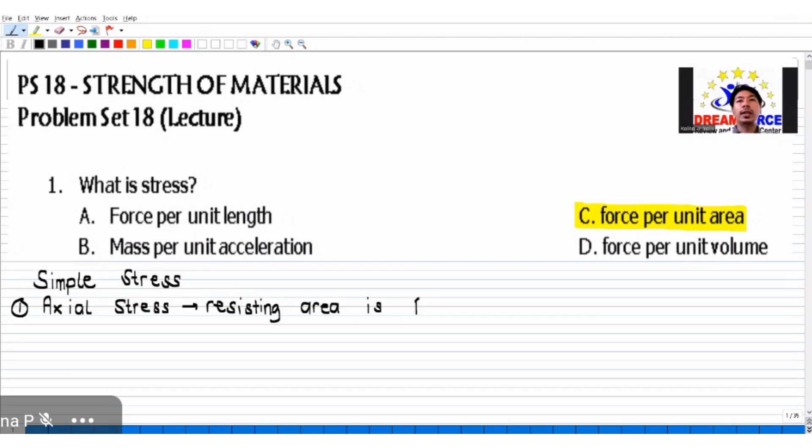Si axial stress, yung resisting area po natin ay perpendicular. Resisting area is perpendicular. Sabi natin, the stress is dependent on the area, based on our formula. So it is perpendicular. Okay, next one.

Si axial stress, meron po tayong dalawang types: the tensile stress, and then the compressive stress. Kung ma-recall po natin sa ating college days, yung pagkakaiba lang po niyan ay yung direction ng force natin. Yung tensile stress, kumbaga pahila. Yung compressive naman, from the word compress, kumbaga iipitin mo yung isang body, ibig sabihin papasok yung ating force. So that are the basic or the simple stress.

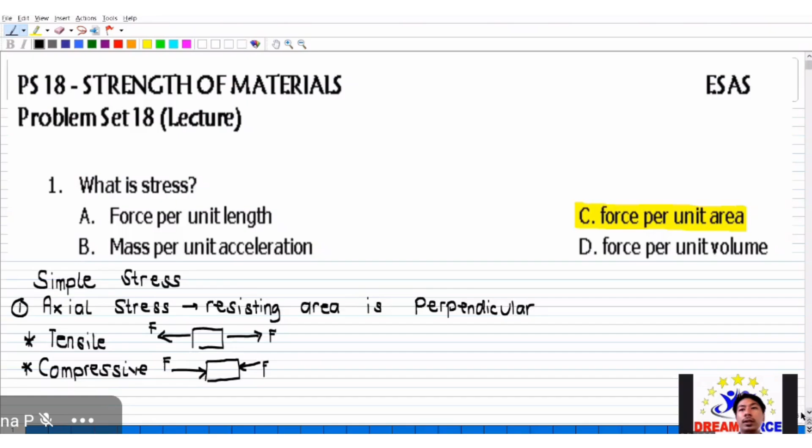Another type of simple stress is the shearing stress. As per the definition, based on the possible na ibigay sa board exam, yung difference niya between axial and the shearing stress: sa shearing stress, yung resisting area po natin ay parallel. Yan po yung difference between the two. Marami pa po yan, bending stress, torsional stress, and so on. But dito muna tayo sa two types. So yan po yung number 1. Kindly take a screenshot.

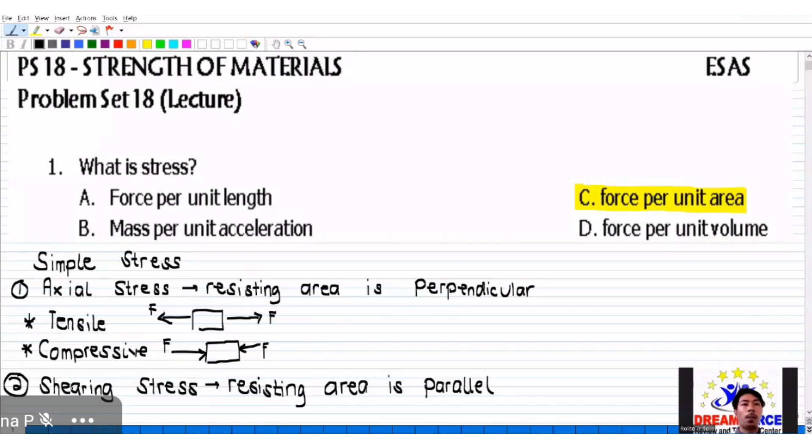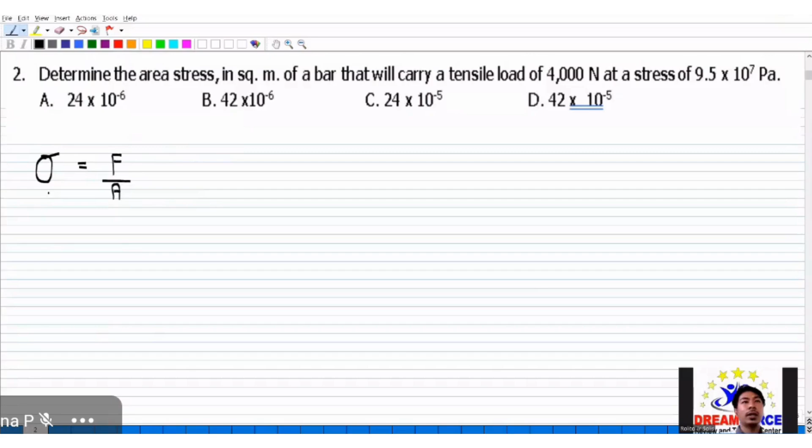Let's proceed on solving number 2. Determine the area in square meter of a bar that will carry a tensile load of 4,000 Newton at a stress of 9.5 times 10 raised to 7 pascals. Yung stress po natin, i-symbolize natin as sigma. This is equivalent to your force divided by your area. Kung ipaparehas po natin sa fluid mechanics, yung stress ay equivalent ng pressure. Ang difference lang, sa fluids ay mga liquids, dito mga solids naman. Since stress is synonymous to pressure, the same sila ng ating units.

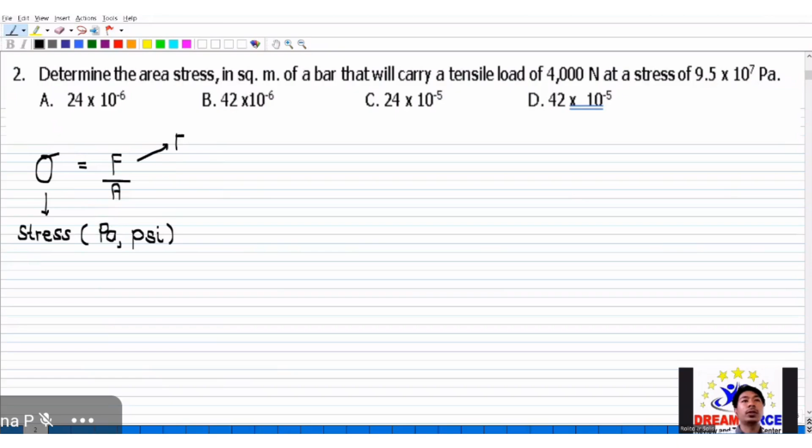The different units of stress: in SI, it is pascals; in English, it is PSI, and so on. Kung ano man yung mga units ng ating pressure, the same with stress. Itong F is the force, pwedeng in newtons for SI, and pound force for English. Ito yung load na bibitbitin or i-withstand ng isang body. And then A is the area, in square meter or inches square, and so on, kung ano man yung binibigay sa given natin.

Let's start number 2. I-apply lang po natin yan, direct substitution. We have the stress, which is 9.5 times 10 raised to 7. Very important po sa ESAS natin na alam nating mag-unit analysis, kasi kahit nakalimutan mo yung formula, based on the unit malalaman mo yung formula. Pascal is Newton per square meter. Newton is a unit of force, from here it is 4,000 Newton, and square meter is a unit of area.

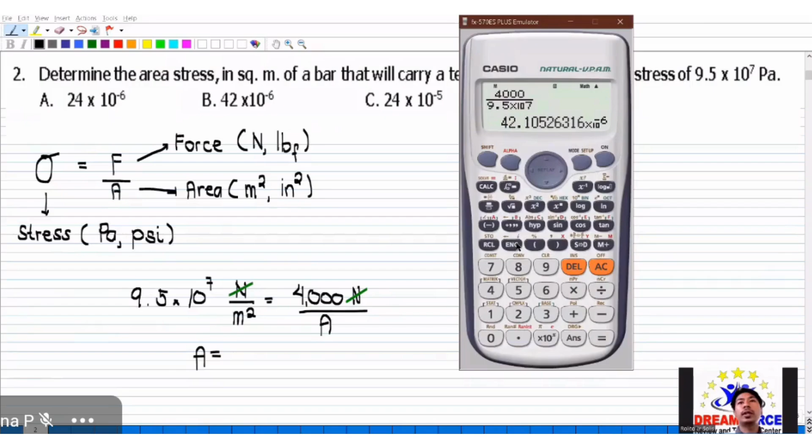Okay, so ayan po. So that's the importance of your unit analysis. Okay, so shift solve, what is your area? Okay, so it is 4,000, divided by 9.5 times 10 raised to 7. Okay, so para maging times 10 to the negative 6, just press ENG. So our answer there would be 42.11 times 10 to the negative 6 in square meter. Okay, so that would be our letter B.

Okay, so yan po yung sagot natin. So double check your solution. Okay, kasi as we can see, merong 10 to the negative 5 dito. Baka nakulangan ka ng 0 or baka namali yung tingin mo dito or namali yung input mo. Kaya always double check your solution. Okay, sige, that would be our number 2.

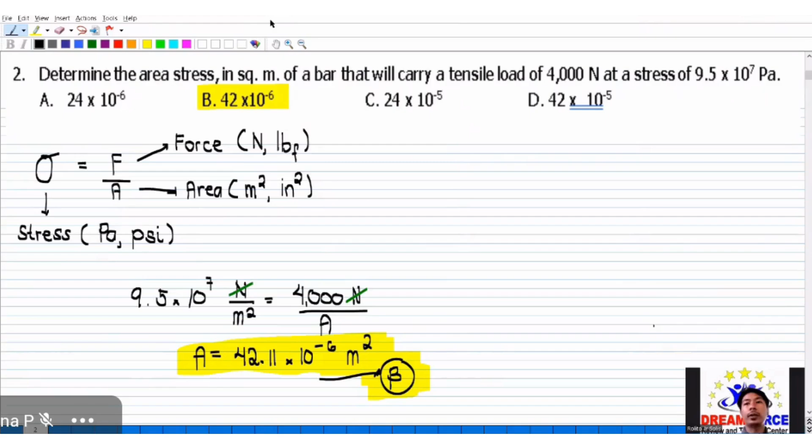Okay, so ang gagawin lang natin dito po sa ating lecture, formula base, and then unit analysis, and then conversions. Ang pangit nga lang po kay strength of materials, napakaraming formula. Pero yung solution niya is usually it is a direct substitution.

Okay, number 3, so find the required diameter of a steel member if the tensile design load is 7,000 pounds, assuming a safety factor of 5 based on an ultimate strength of 60,000 pound force per square inch. Okay, so dito meron po tayong new given, which is the safety factor.

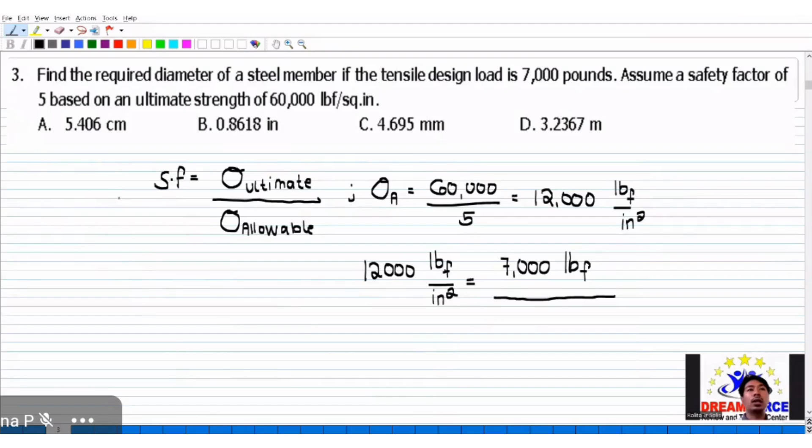So keyword mo lang dyan, basta wala kang nakitang word na hollow or walang binigay na outside diameter, inside diameter, or thickness, always assume that our circular is solid. So therefore, wala naman po tayong keywords dyan. Walang thickness, walang outside, walang inside. So we will assume that that is a solid. In the case of solid, our formula is just pi over 4 times the square of the diameter.

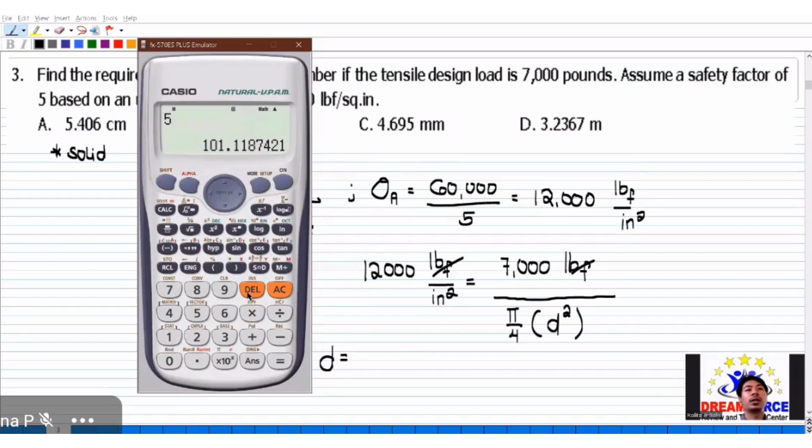Okay, so 0.8618. So since meron naman po yan sa choices, yun na po yung sagot natin. Unless in-specify sa problem na isosolve daw natin in millimeters or in centimeters. Okay, so answer there is your letter.

Okay, so formula-based po ito, direct substitution. So, di naman na kailangan ng solution sa board exam, so pwede na po yan agad i-shift solve. Okay, sige, that's our number 3.

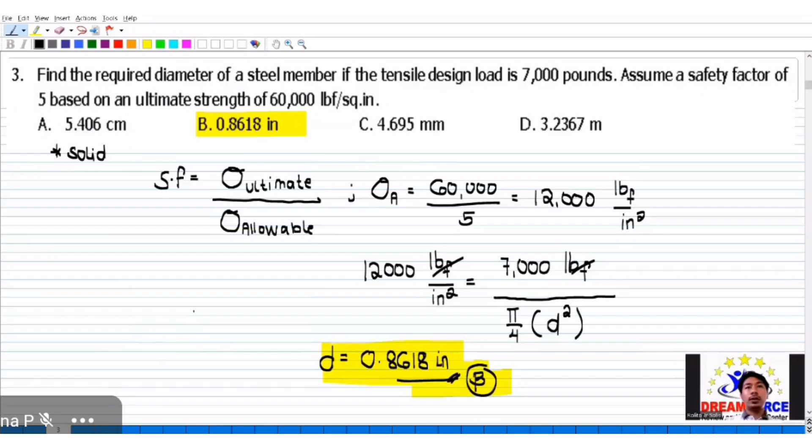Okay, next one, so let's proceed on number 4. So, determine the outside diameter. Ito na yung sinasabi ko po, engineers. So, we have a keyword, hollow steel tube. So, that will carry a tensile load of 500 kilonewton at a stress of 140 meganewton per square meter. So, assume the wall thickness to be 1/10 of the outside diameter.

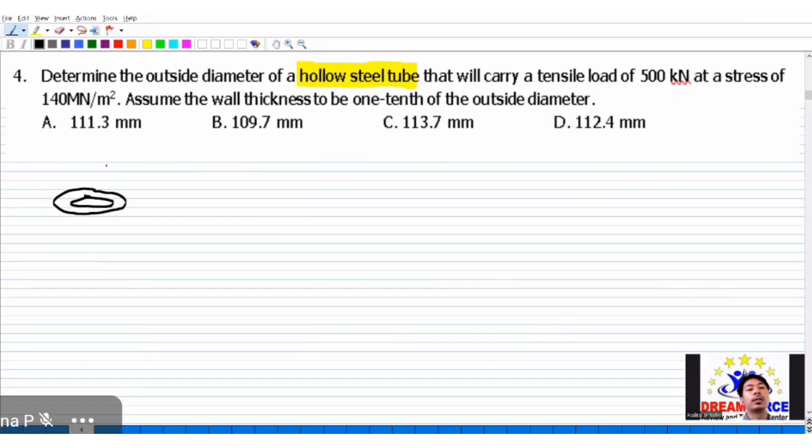Okay, again, so formula po natin, so stress is equivalent to force over area. Okay, so ito engineers, so at hollow circular shape. Okay, so di ba, kung maalala pa nung college, meron tayong dalawang formula na ginagamit dito, di ba? Okay, so first, yung area is pi over 4, multiplied by the outside square minus the inside square. So ito po yung hollow. Okay, and then also area is also pi dt. Okay, ito naman yung sa integral calculus, ito yung parang disk method natin, di ba? Yung pi dt.

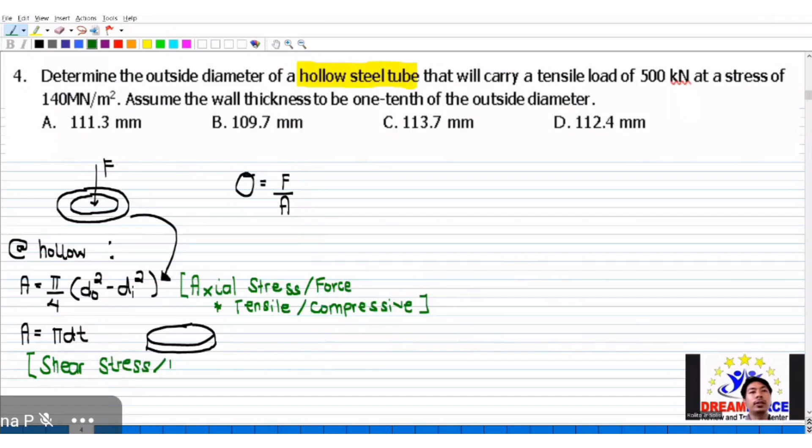Yan. So from our number 4, dito daw ay tensile. So ibig sabihin, ang gagamitin natin is yung hollow tube natin. Okay, kung hindi ka sure, pwede mo namang i-trial and error, kung yung ginawa mo ay wala naman sa choices. Okay, so then also, di ba meron tayong relationship: the outside diameter is equivalent to the inside diameter plus twice of our thickness.

Ayan. Okay, so and then also engineers, meron po akong ibibigay na optional na pwede mong i-memorize na conversion. Wherein 1 megapascal, this is also 1 meganewton per square meter. Parehas lang din po yan sa 1 newton per square millimeter. Okay, optional, so pwede mo pong gamitin or hindi. So 1 megapascal is also 1 newton per square millimeter. Ayan, shortcut conversion na po yan, kung gusto mong gamitin. Okay, so ang hinahanap dito ay the outside diameter. So therefore, gagamitin natin tong area na to.

So as we can see, let's check the given. So meron na tayong stress. So okay na. Meron na rin tayong force. So sa area na lang, ang unknown natin ay outside, but wala tayong inside diameter. So it will be two unknowns. So kailangan pa nating mag-convert or kumuha pa ng isang formula.

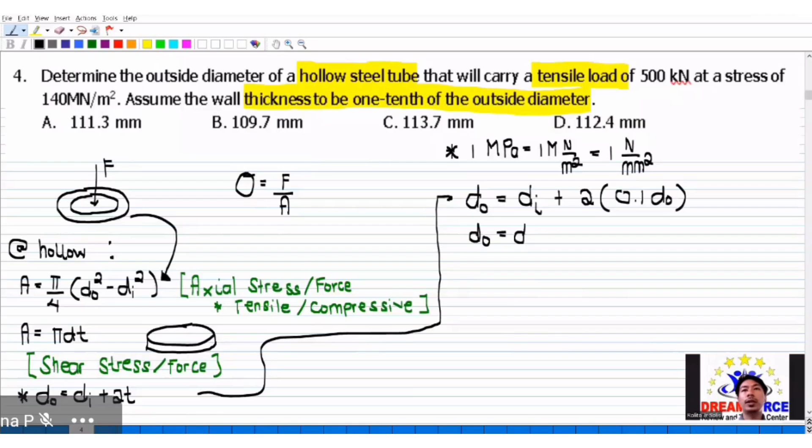Okay, wherein pwede nating gamitin po, engineers, itong relationship na ito: the outside diameter is equivalent to the inside diameter plus twice the thickness. But sabi niya din dito, the thickness daw ay 1/10 of the outside diameter. So therefore, I can substitute. So this is 2 multiplied by 1/10, or 0.1, of do. Okay, so simplify lang po natin. So we have the outside diameter equivalent to inside plus 0.2 do. So therefore, the inside diameter now is 1 minus 0.2, or 0.8 of do.

Okay, so ayan, so pwede na po natin yung i-substitute doon sa ating inside diameter. So there will be one equation with one unknown. Okay, so substitute. So since yung choices ay millimeters, so ang gagawin ko na lang po yung stress, i-convert ko na lang sa millimeter. Okay, or ang pwede mo namang gawin, depende po sa inyo kung saan kayo mas nadadalian. So pwede nyo rin gawin, i-remain nyo yung stress and then yung makukuha mong diameter later on, i-convert mo sa millimeter. Okay, so anyway, parehas lang po yung sagot.

So ang gagawin ko na lang, engineers, yung stress, convert ko na lang siya sa per square mm. Okay, so I can use this conversion. Sabi natin, yung 140 meganewton per square meter is also 140 newton per square millimeter. Okay, alisin mo lang yung m. So this is equivalent to, so we have 500 times 10 raised to 3 newton. Okay, so kung iba yung conversion mo, kung ni-remain mo as meter, tapos yung sagot mo later on kinonvert mo sa millimeter, so no problem with that.

Okay, so pi over 4, multiplied by the outside diameter squared, minus the inside, but inside is also 0.8. At least yan, engineers, direction na. So, hindi na po ako magko-convert. Shift solve, what is our outside diameter? Let's try to calculate. So, 140, this is equivalent to 500 times 10 raised to 3, divided by pi over 4. Okay, and then multiplied by x squared, or you can also calculate 0.8x and then square.

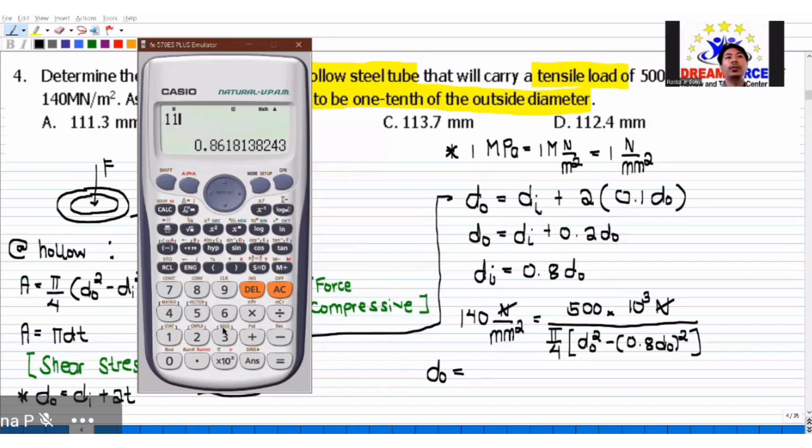Shift solve. So let's say 115. Okay, answer there is 112.4 mm. Okay, that is your letter D. Okay, so that is our answer. Yan, kung nag-meters ka, so yung makukuha mo dito ay meters. So, convert mo na lang po siya sa millimeters. Anyway, parehas lang po yung sagot. Sige, so kindly take a screenshot.

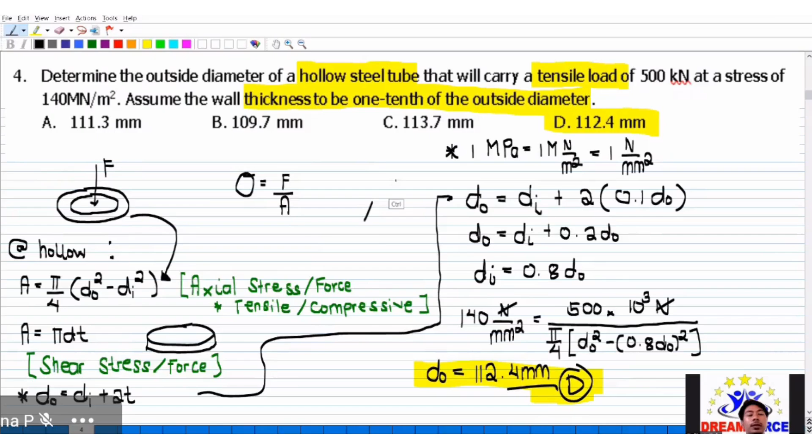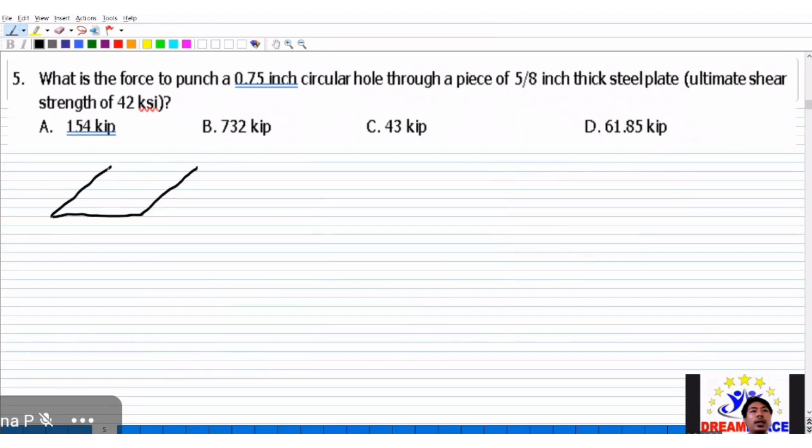Okay, sige, let's go on to number 5. So, what is the force to punch a 0.75 inch circular hole through a piece of 5/8 inches thick steel plate? Ultimate shear strength of 42 KSI. Okay, so again, dito meron tayong thickness. Ibig sabihin, that can be a hollow or may butas sa gitna. Basta may thickness, dalawa po yan, no? It is either hollow or disc. So hindi na po tayo mag-i-imagine, but rather, we will just see the keyword.

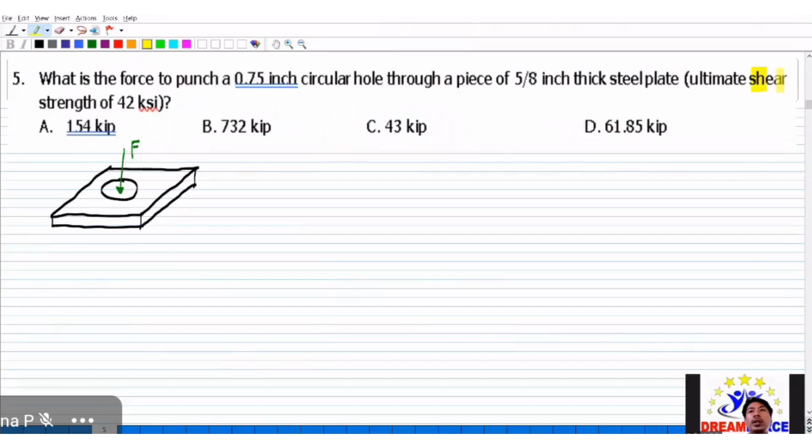Okay, so ganito po yung problem natin. So meron daw tayong plate. Tapos bubutas daw tayo. So dyan, ano daw yung force na ibubutas natin dito? Okay, ayan. So as we can see ulit, since yung keyword natin ay shear. So ito, shear stress. Ibig sabihin, yung ating gagamitin na area is disc. Ito po yung involved cross-sectional area natin. Okay, so formula ulit, stress is equivalent to force over area.

Kung nagwa-wonder kayo, sir, ang binigay ay ultimate shear strength. Di ba dapat sir, ang gagamitin natin dito is allowable, which is true. But engineers, pag binigay po tayong ultimate shear strength, pero wala pong binigay na safety factor, we will assume that your safety factor is 1. Therefore, yung allowable ay parehas po sa ultimate shear, since wala namang safety factor dito.

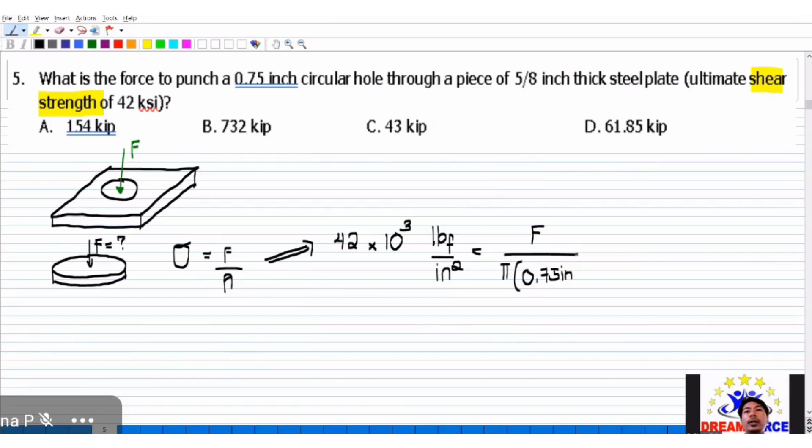So therefore, substitute. We have your stress, 42 KSI. KSI means 1,000 PSI, kilo PSI. So this is 42 times 10 raised to 3 PSI, pound force per square inch. This is equivalent to your unknown force divided by our area. Since that is a disc, the area involved is pi multiplied by our diameter. Default sa circle natin, based on plane and solid geometry, pag walang sinabing radius, it is diameter. Multiplied by our thickness, 5/8 inches.

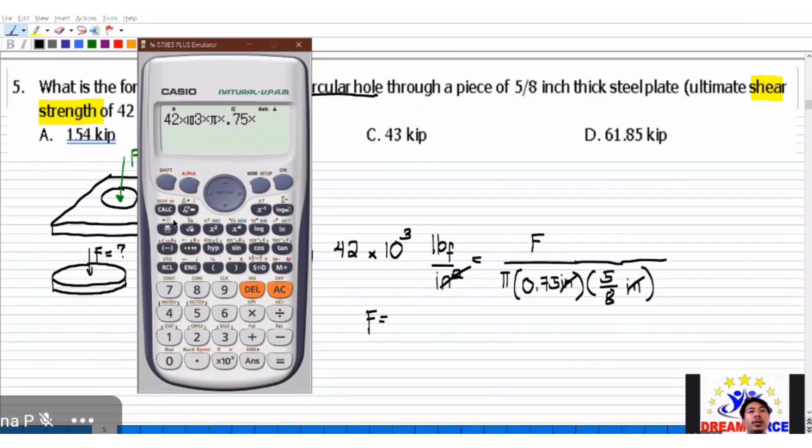Cancel out. Square inch times inch, square inch, so magka-cancel. So that is the value of our force: 42 times 10 raised to 3 times pi times 0.75 and then times 5/8. Sagot po dyan ay 61,850.11 pounds. Yung choices kips. Ang ibig sabihin po ng kips ay kilopounds. So press ENG or divide that by 1,000. So 61.85 kips. Kips means kilopounds, KSI means kilo PSI. So answer there is your letter D.

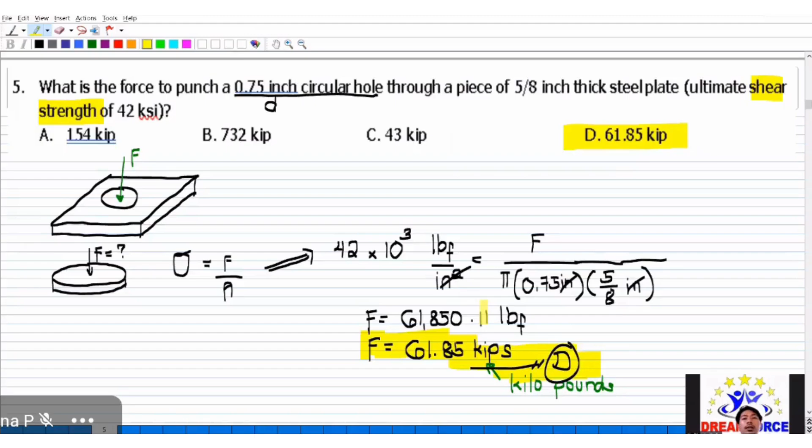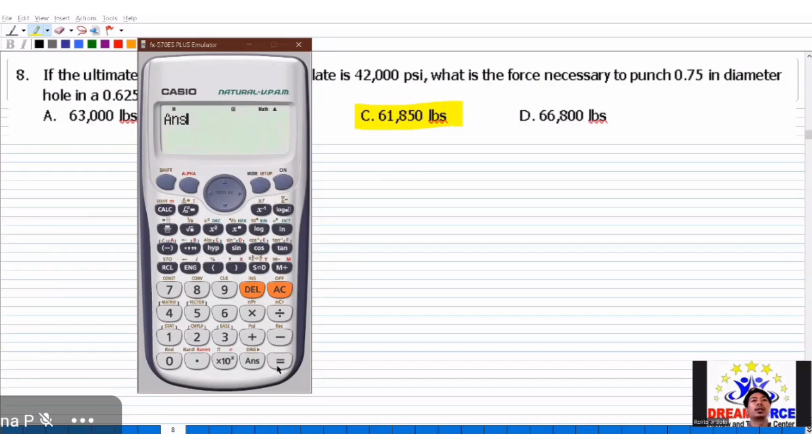And I think may kaparehas po yung number, yung number 8. Yung number 8, ang sagot ay letter C. Hindi lang ginawang KSI, PSI na. And then yung 0.625 kasi 5/8 lang din yan. Kaya parehas na parehas. Kaya wag na po natin i-solve. Same with number 5. Okay, sige, so that is number 5. So again, formula based and unit analysis tayo.